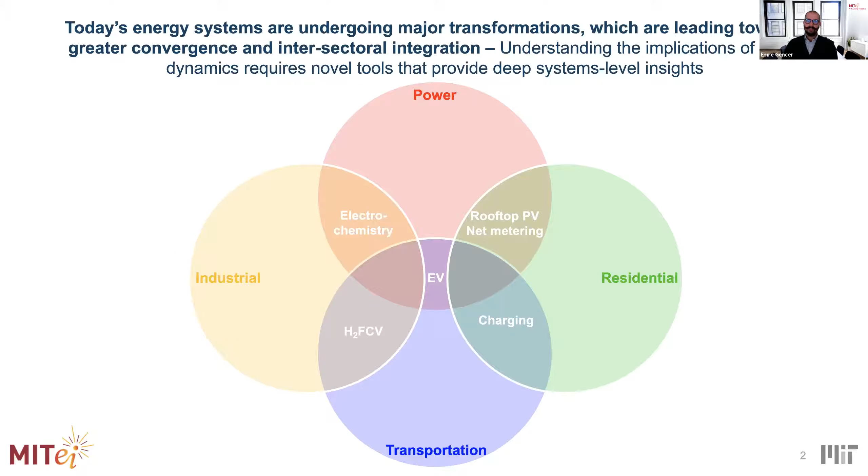So when we look at this system, one of the challenges is, so far, the energy system modeling field has been focusing on individual sectors. There are very detailed models for the power sector, and similarly for industry and transportation. When we start having these linkages, which weren't common a couple of decades back, we need to develop new methods and new tools to understand this challenging, new complex system. The second point I want to emphasize is decarbonization. One of the pillars of the energy transition is, of course, decarbonization.

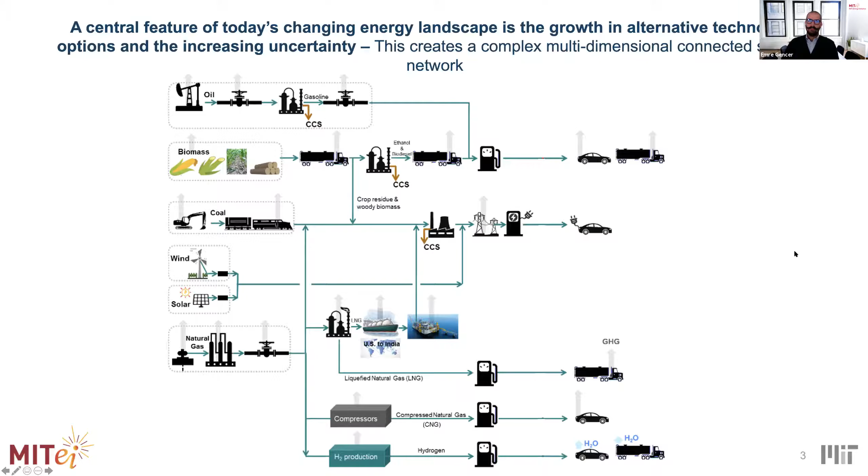So over the last couple of years, we've been developing this tool called SESAME to basically provide insights on the feasibility, scalability, and emission reduction potential of various technology pathways. And in 4 points, the main purpose here is to assess and compare technology options, perform technology and system scenario analysis, explore the implications of policy dynamics, and perform cross-sector comparisons.

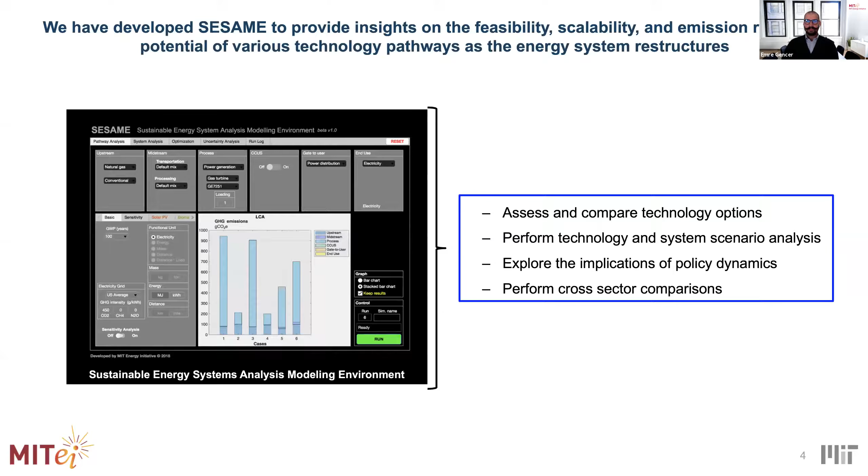And you can see we have defined the entire energy system in terms of 6 life cycle stages, starting from upstream, midstream, process, carbon capture, utilization and storage, gate to user, and end use. Each one of these vectors is looking at different options. So in the upstream case, you can see the resources from renewables to fossils. And in each one of these modules, you will see many different sub-modules. Like for natural gas, we have different options, conventional, shale gas. And even in these ones, you can go to different locations, so on and so forth.

Midstream is looking at how we can transport these resources to the processing step to be converted to power or other products like gasoline, diesel, hydrogen, iron and steel, so on and so forth. And CCUS is one of the key focus areas in our low carbon energy centers, because to have deep decarbonization, we really need to incorporate carbon capture in our technology portfolio. And that's exactly why we have dedicated an entire vector for different CCUS options. And gate to user is transporting the products to the end use, and under end use, we are covering major end use sectors like electricity, heat, fuel for transportation, and chemicals.

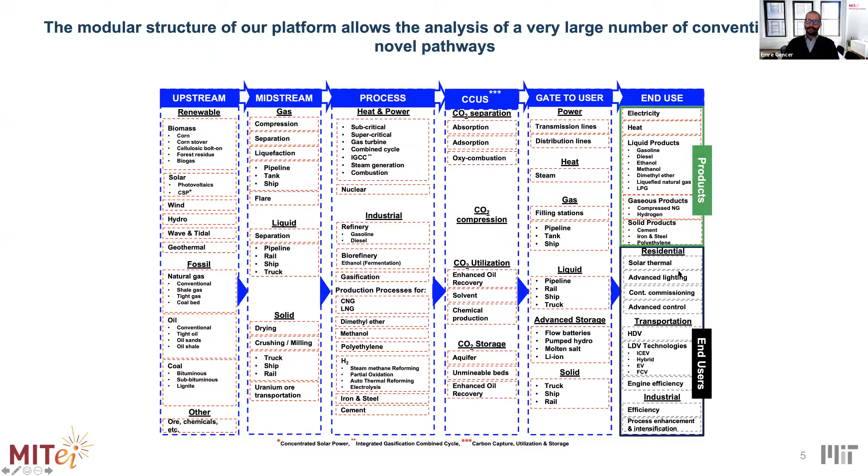And so far, we've been developing this tool in different platforms, and now we are close to getting ready to launch our open access platform to perform pathway and system level analysis. So this version will be a web browser-based tool in which you can perform all the analysis that I will be discussing in this talk. But just to give you an overview, you can build different pathways, you can perform life cycle assessment and techno-economic assessment for all these pathways. And another analysis type is system-based analysis, which is represented by a fleet model for vehicle fleet and a power system model.

And also we've been monitoring the electricity demand due to COVID for the entire US. And this is also live, so you can go to sesame.mit.edu and you will see there is a COVID dashboard. So it's not fully developed, but at least you can follow the electricity trends by going to this link.

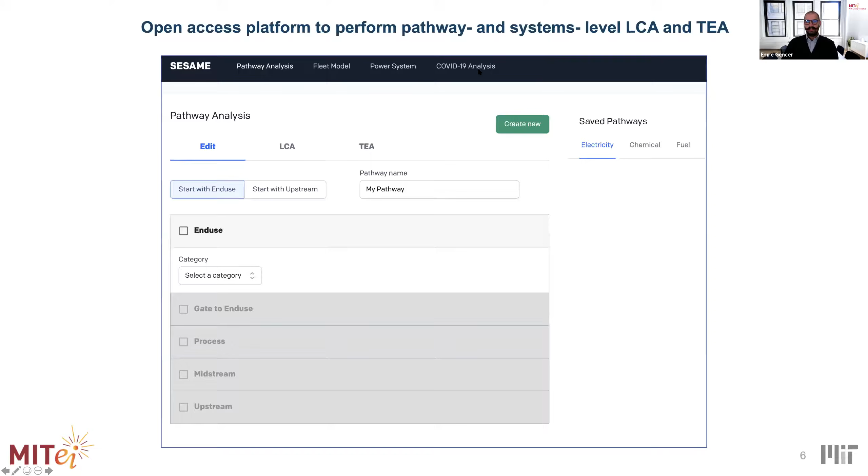I want to give you a couple of examples on how we can use this matrix and how we can use our tools to get some insights about the changing energy system. And I will start with building a natural gas to electricity pathway. And also I want to show you how this is working in the backend.

So basically, when you start building a pathway, and you can build pathways in either direction, either from upstream to end use or end use to upstream, each one of these modules has linkages to the next and previous steps. So let's start from natural gas conventional, connect to compression to adjust the pressure for the pipeline transport, and send it through pipelines to a combined cycle unit.

And in the combined cycle units, we produce power, and it is transmitted and distributed to be used as electricity in any end use application. And we can call this pathway 1, natural gas to electricity. Now let's look at the user interface, how this works.

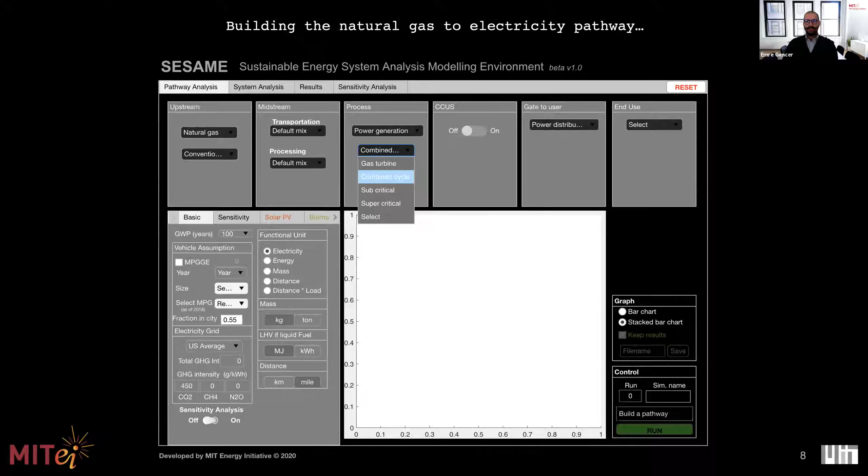So this is an earlier version, which is the currently working version of SESAME. And here you can build the same pathway by using drop-down menus with different options. And you can have the results for different part loadings of combined cycle units as well as gas turbine units.

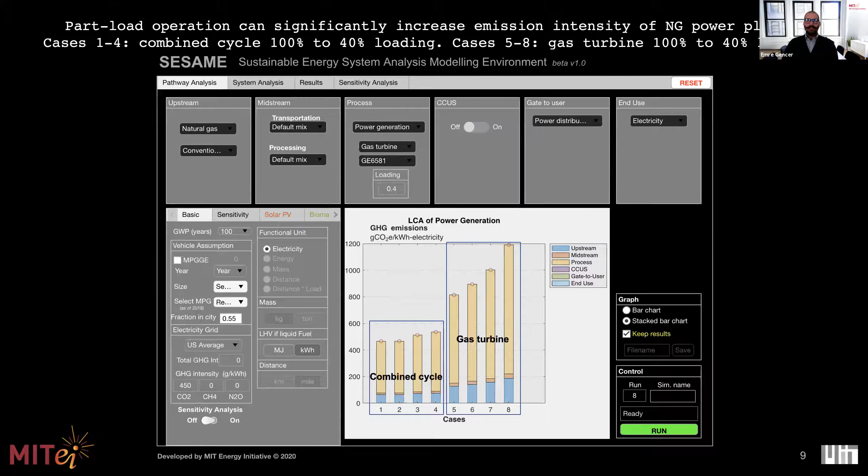So to understand what kind of impact it has over the operation of an entire grid, we also need to understand the grid composition and also how in reality each one of these plants is operated. To look into this, we really need to use real world data. And in the US, some of these data sets can be found in publicly available sources. And in SESAME, we have actually embedded all the fleet level, unit level data in generation as well as emissions for the entire US fleet, which is approximately 10,000 units.

So there are a couple of implications of this. First of all, these are becoming more idle units as we are not operating at base load, which they were supposed to do. Secondly, we are operating at an inefficient regime because we are now doing these cyclings, part loading, as well as startups and shutdowns. And third, when we want to decarbonize these kinds of plants, the dynamic operation of carbon capture facilities is quite challenging.

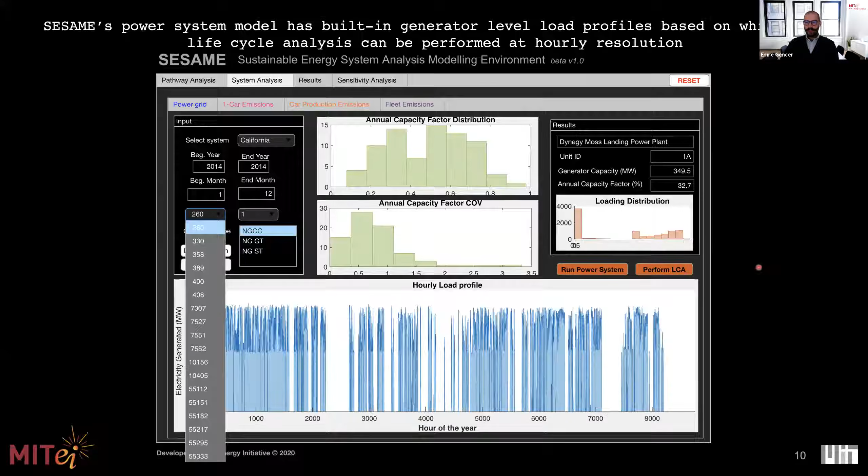So when we talk about bringing together all these data sources, this wasn't a very easy task, because even though these data sources are publicly available, all the information you require is not readily available in one single database. So what we had to do was to match different data sets and collect information from different databases, namely the eGRID dataset and CEMS dataset.

And now we have created a single database which has all the unit level information as well as hourly load profiles going back 15 years, that is embedded in the SESAME platform, and it will be accessible through our open access platform. Now we have unit level data on hourly emissions, hourly generation, nominal capacity values, and so on.

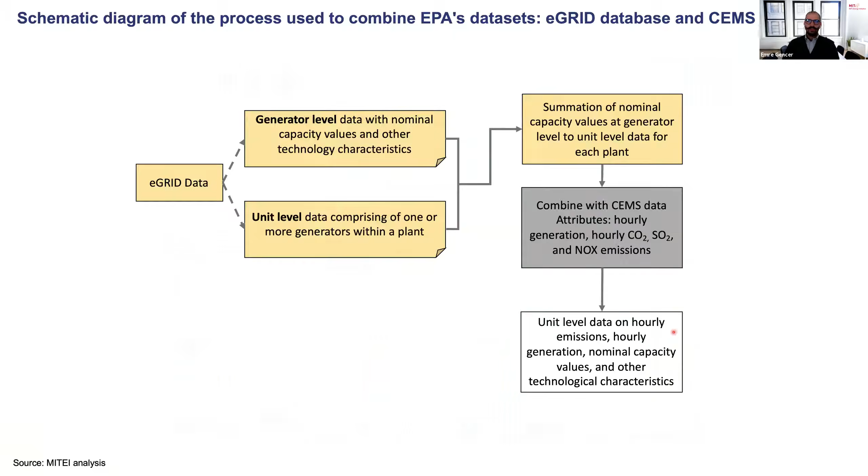And with the easy user interface, you can play around and do a bunch of analysis. Before showing the type of analysis you can do, I also want to revisit this previous graph about the cycling hourly load profile of a combined cycle unit, and show you what fraction of time is actually spent in part loading.

So here you can see with these orange dots, we are looking at the loading ratio, which is between 40% and 80% for this particular unit. And you can see that actually it is cycling all the time. And there are many points throughout the year that are zero load or very low loading ratios. And these lower loadings that you are seeing here, approximately 20%, are mostly startup or shutdown. Since we have hourly data, we are not able to capture sub-hourly operational trends.

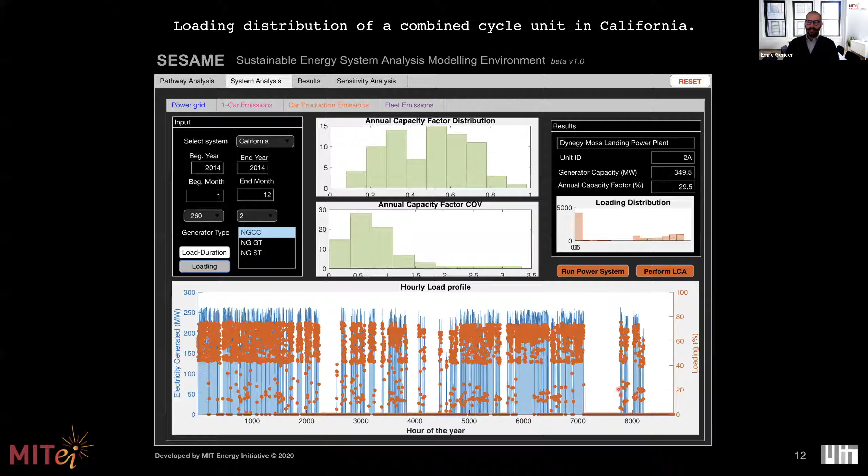So this is from a recent manuscript that we have submitted, basically using all these data sets from the CEMS data and also using the SESAME platform. We have looked at how the operation of combined cycle units and gas turbine units has changed from 2011 to 2017, where these units are spending more time, and also how the emissions are distributed between these different operation modes.

So here we've classified these operations under 4 categories: startup and shutdown, part loading, which is lower than 80%, nearly full load, which is higher than 80%, and full load, 100% or nameplate capacity. The 2011 generation is shown in blue, and 2017 generation is shown in purple. The bar charts are showing the total generation, shown on the left, and curves are showing the total emissions, shown on the right-hand side vertical axis.

And so here we will see 2 comparisons. The first one is an annual comparison for a particular unit type, combined cycle and gas turbine units. And the second comparison is between combined cycle units and gas turbine units. So the first observation is that for combined cycle units, the startup and shutdown time has changed. Here the x-axis is the hour of the day. Earlier in 2011, we were seeing startups in the early morning hours, which has shifted towards afternoon hours now.

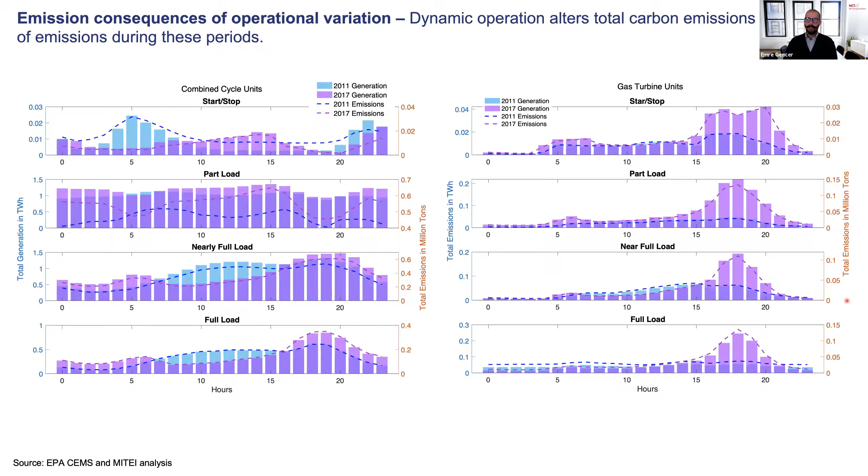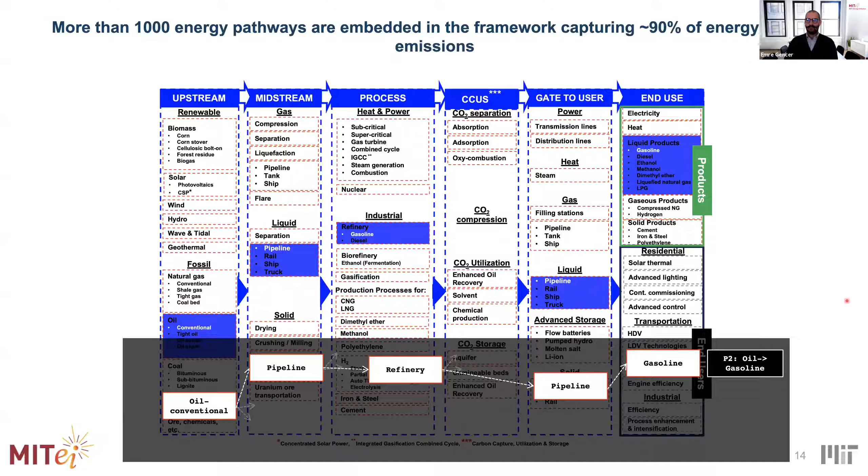And for the transportation sector, we can start with building a normal internal combustion engine vehicle pathway, starting from conventional crude oil transported by pipelines, refined in refineries to produce gasoline, transported by pipelines, and finally in the gas stations to be used for light duty vehicles. So here, one simple example of analysis we can do is calculating the life cycle assessment of light duty vehicles using gasoline. This graph is looking at gram CO2 equivalent per mile driven, and it includes all the life cycle stages from upstream all the way to end use.

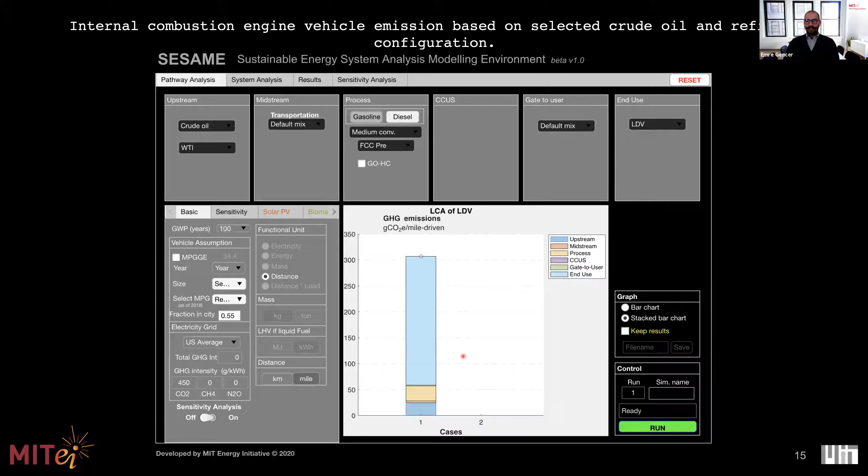One missing piece that you will see here is this is operational life cycle emissions, meaning it doesn't include vehicle manufacturing. Vehicle manufacturing traditionally does not contribute as much to the overall life cycle emissions, but as we move to new vehicle types like battery electric vehicles and fuel cell electric vehicles, vehicle manufacturing starts becoming an important part of the overall emissions. So to address this issue, we can also look at detailed car emissions, and here we can do operating emissions only, as well as vehicle manufacturing emissions that include changing the batteries, manufacturing batteries, and so on.

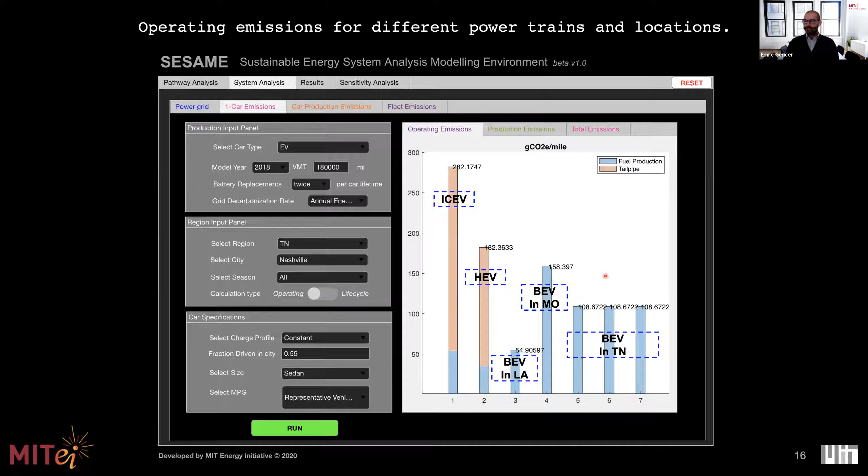But this particular one is only looking at operating emissions, similar to the previous one, and it looks at fuel production as well as tailpipe emissions. And for battery electric vehicles, we are looking at different states based on different compositions, and you can see depending on the emission intensity of the grid, battery electric vehicles' overall life cycle emissions can be quite different; it can vary by a factor of 3 or more. And we see internal combustion engine vehicles have the highest emissions among hybrids and battery electric vehicles. But actually, I want to show you results from our recent study, Insights into Future Mobility.

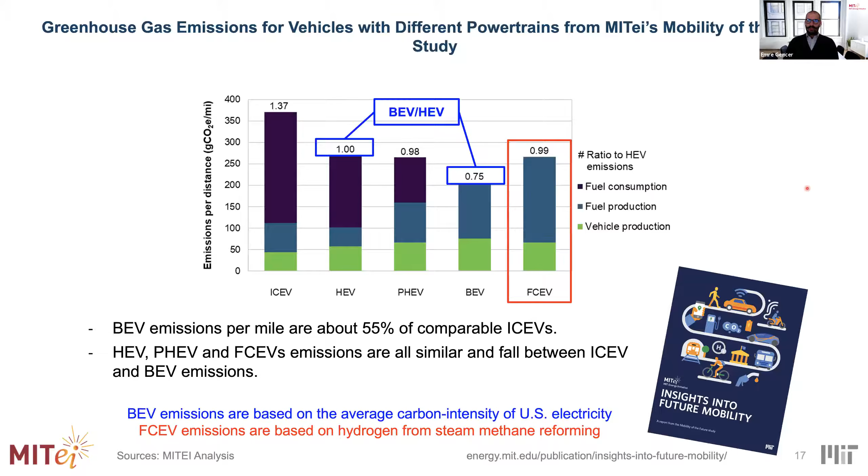basically there is very low emission coming from electricity generation, and we can continue looking at other green states like California or Massachusetts, Vermont, so on and so forth. And in all of these regions, using battery electric vehicles can show a significant reduction in overall emissions, and it can really help the decarbonization of the light duty transport sector.

But if we are in other states or in other power systems in which we still have coal in the mix, or the emission intensity of the grid is not as clean, then actually switching to hybrid electric vehicles can benefit more relative to battery electric vehicles. And some examples are Indiana, Ohio, Utah, where coal is still contributing significantly to the power generation. And in these states, actually, the advantage we will be getting driving hybrid electric vehicles is more than switching to battery electric vehicles.

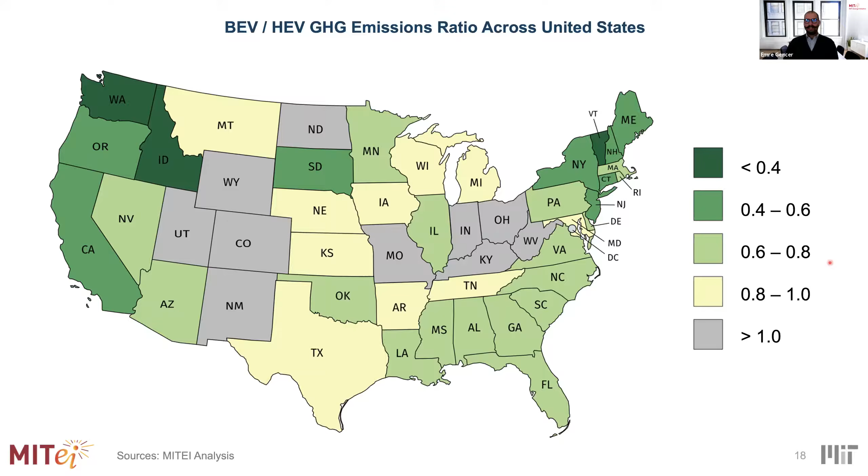And this is a static snapshot of how we can use these kinds of analysis and a tool like SESAME. But I also want to highlight more details about how we charge, how we drive, and what kind of contribution each one of these parameters can have over the life cycle emissions of battery electric vehicles. So here I wanted to compare two green states, California and New York in this case. And I want to show, first of all, the generation mix and how it is different between these two systems.

And from the color code, you can see both have similar emission intensities, but the composition of these grids is quite different. So in California, we are seeing huge solar, and also as we've discussed in the previous slides, the midday generation is mostly dominated by solar generation, which is increasing every day. And when we switch to New York, the generation is mostly balanced between hydro, gas, and nuclear. And what we observe here is that nuclear is contributing quite substantially as a base load, which is significantly driving down the emission intensity of the New York grid.

And when we look at the percent of total generation, you can see solar's contribution during daytime in the California system, which is quite significant. And also we are seeing a dip in gas generation during the same time because we don't need that much power in the grid. So we either cycle down, turn down, or shut down these plants during these periods of time. And when we look at the New York system, actually we see almost steady nuclear generation and gas generation, which are complementing each other. And hydro is quite stable, and we are also seeing an increase in wind generation.

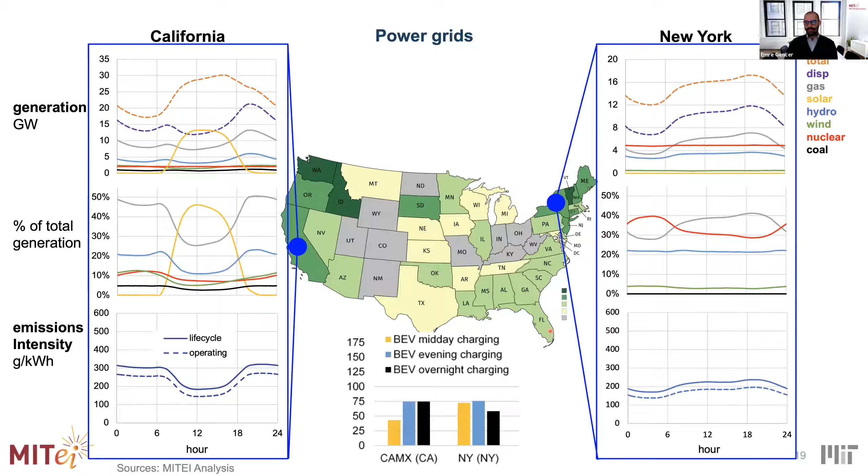And these are still looking at one vehicle emissions. So what we are really interested in is, from a fleet perspective, what will be the emission consequences of switching to certain powertrain options or certain fuel alternatives. And to address that issue, we have also built a vehicle fleet model that can take different scenarios and calculate the energy use by fuel type as well as emissions for different scenarios.

And here you can either create your own scenarios, or you can use any scenarios from any report like EIA's, IEA's reports, Bloomberg's energy reports, so on and so forth. And you can play around with the assumptions about the penetration of different vehicle types, emission intensity of the fuel types, and all of this analysis is also connected to the pathway level analysis.

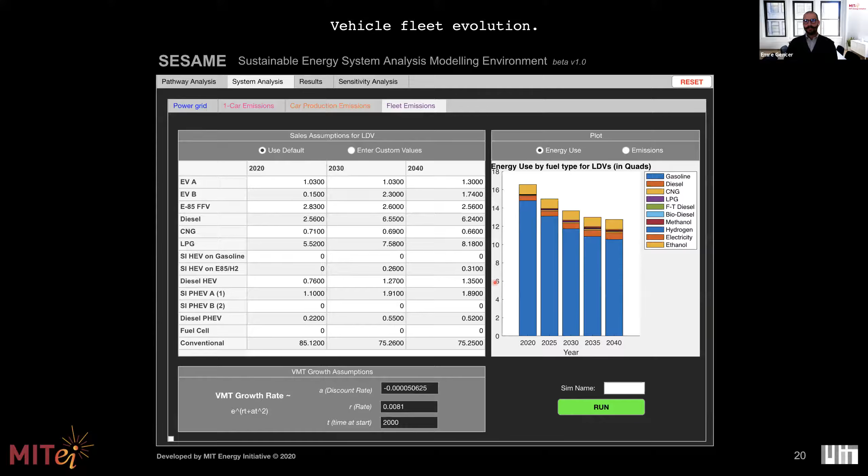So basically, if you have a new technology, either a vehicle or a fuel production type, you can see the impact of these advancements from a fleet perspective. And also you can calculate the life cycle greenhouse gas emissions for the fleet.

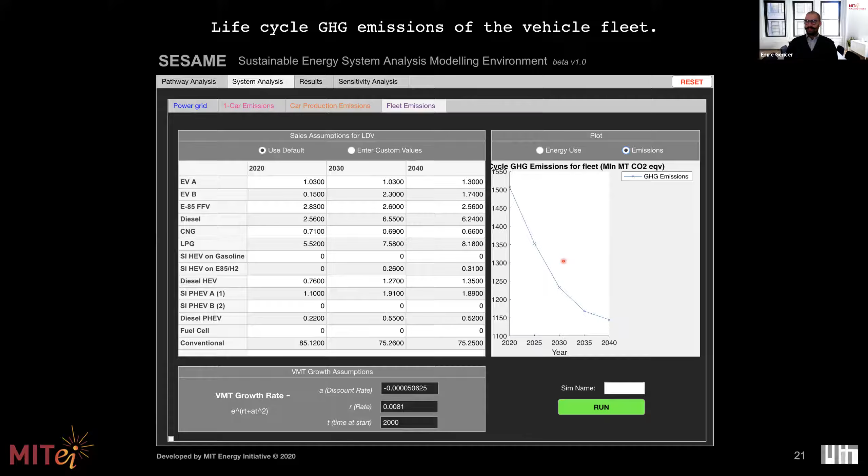So about the fleet, I wanted to give you an example from recent news about the California governor signing an order banning sales of new gasoline cars by 2035. So we have done two extreme cases just to demonstrate how much of a difference it can make. But actually our results raise more questions than answers, and Ian Miller has done all this analysis. And if you have any questions, please feel free to reach out to him.

So here we are comparing two projections. The first one is EIA's annual energy outlook projection, which is business as usual. And the second option here is banning internal combustion engine vehicles starting in 2035. So let's first look into annual energy outlook projections.

The first graph is looking at the sales, total sales in million by vehicle type. The second chart is looking at the fleet, the overall fleet, and how it is changing. The third panel is looking at the fuel use in terawatt hours, and the fourth one is looking at operating life cycle emissions. So this doesn't include vehicle manufacturing.

So first, let's look at and understand the business as usual case for California from the annual energy outlook. So as you can see, we are seeing some increase in battery electric vehicles, but the sales are still dominated by internal combustion engine vehicles. And we see that the fleet is almost completely internal combustion engine gasoline vehicles.

So we see a decline in fuel use, although we see an increase in the total fleet. So it is going up from 30 million to almost 40 million, but we are seeing a drop in overall fuel use from 450 terawatt hours to 320 terawatt hours. And this decline is mostly due to fuel economy improvement for internal combustion engine vehicles and lightweighting of these vehicles that's expected over the next couple of decades.

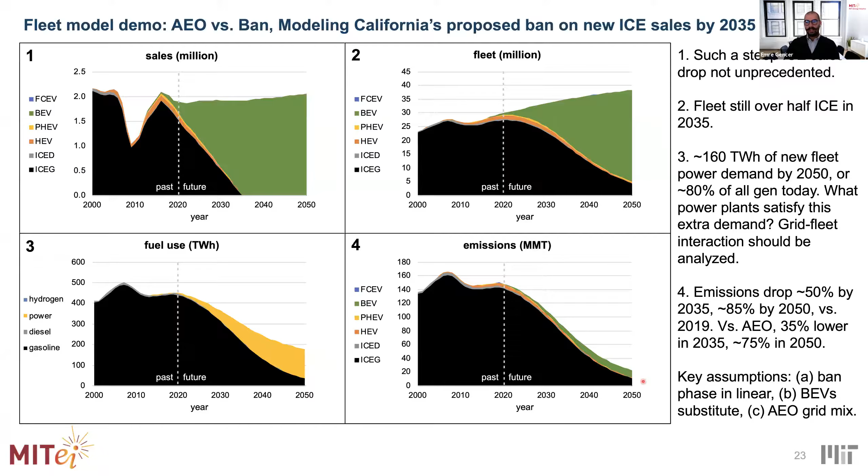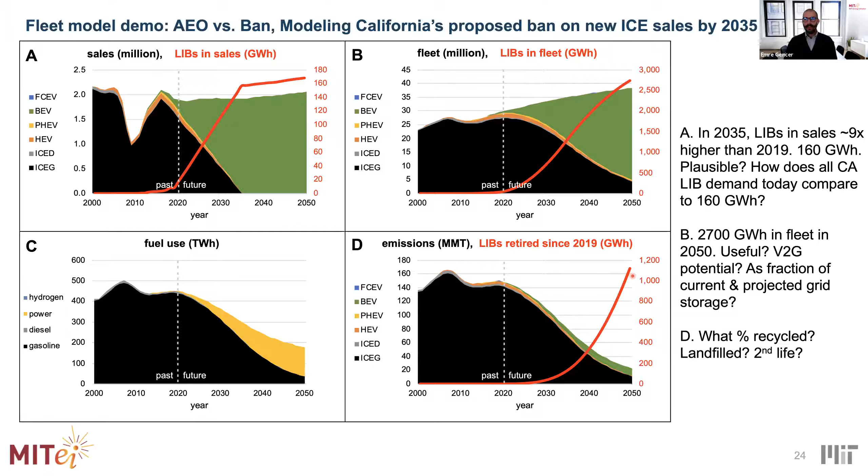So the next question will be about the material limitations, whether we will be recycling these, what kind of landfill we need for storing this waste, as well as how we can use them in second life applications. So these are just some of the analyses that we can quickly do, and once we have the open access version, you can play around with as many scenarios as you like and create some of these cases and see the impact of different choices.

And also, before finishing up, I just want to highlight that we have built this platform quite flexibly to be able to connect to different modeling tools, data sets, and other capabilities. And we have some ongoing work on connecting with other available tools and data sets that will be published soon.

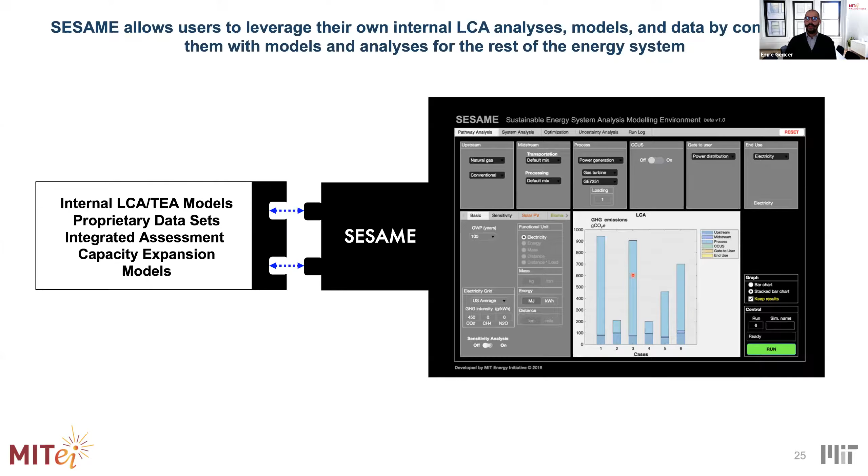So just to finish up, we are seeing a huge change in the energy system, and we need to understand this from both pathway and system level analysis. So we need new tools to identify business opportunities and potential emission reduction options. A multi-platform approach is very key here, because each tool has different advantages and strong suits, and if we can collectively use different tool sets, then we can have more accurate analysis.

Basically, we also need to really understand the goals of different regions and match these goals to the regional resources.